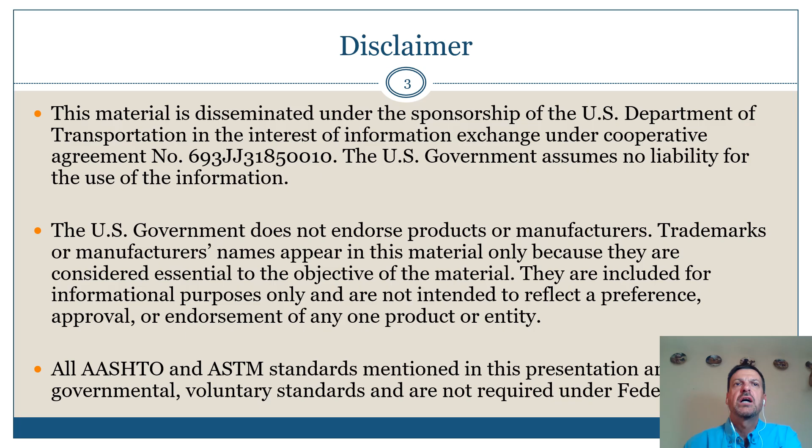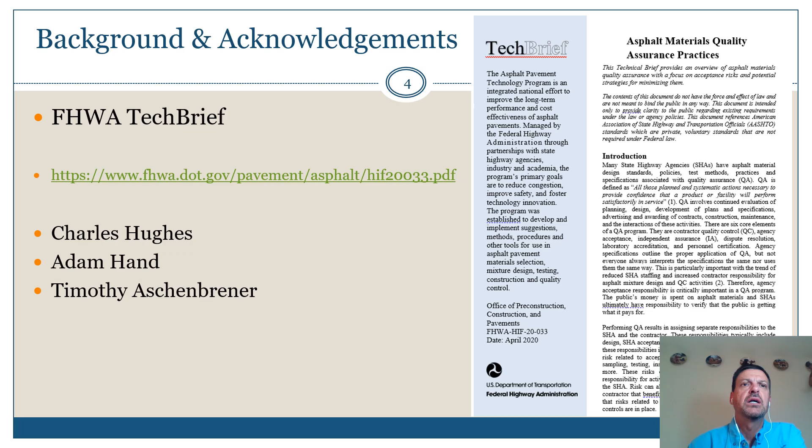In terms of background, this presentation is really based on a tech brief. The link to the tech brief is on the page there, and it was written by Chuck Hughes, myself, and Tim Aschenbrenner.

Why does it matter? Why did we put this tech brief together? Because it's important to agencies, contractors, and taxpayers. Quality assurance is defined as all those planned and systematic actions necessary to provide confidence that a product or facility will perform satisfactorily in service.

Everybody has a stake in that. It's important to agencies because they want to make sure they get what they pay for. It's important to contractors because they want a level playing field when they bid and build work. And it's important to taxpayers because they want to make sure the agencies have been good stewards of their tax dollars. When we implement a quality assurance program, responsibilities are assigned to different parties.

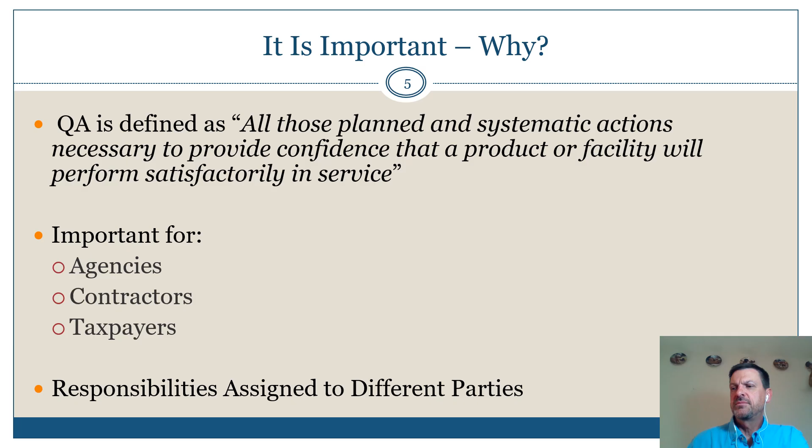We will sometimes end up with different risk in that situation. This is the 6 core elements of a quality assurance program, and the 2 key elements are agency acceptance and contractor quality control.

The other 4 items—technician qualification, lab qualification, as well as independent assurance and dispute resolution provisions—are there to really help ensure the accuracy of the agency acceptance and contractor quality control information that will be used in the acceptance decision made by the agency.

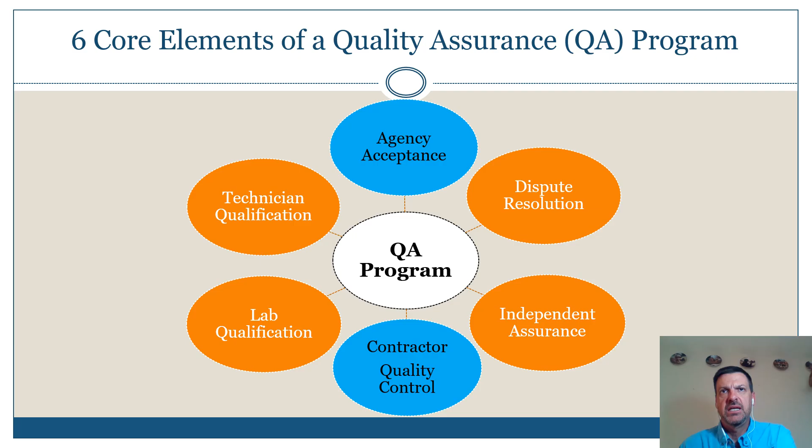AASHTO R10 has the definition of an acceptance plan, defined as the agreed upon process for evaluating the acceptability of a lot of material that includes lot size, sample size (number of samples), quality measure or measures used, acceptance limits, evaluation of risks, and pay adjustment provisions.

Different responsibilities are assigned to different parties because different folks do different testing—the agencies doing acceptance and the contractors doing quality control.

Risks: the acceptance plan inherently has risk built into it, and an agency needs to evaluate all those things listed on the slide when developing its acceptance plan, so that the risk is balanced between the contractor and the agency. The risks that exist from a statistical perspective are what we call buyer and seller risks, or beta and alpha risks.

Buyer risk is the risk that the agency, the DOT, is going to accept material that they shouldn't be accepting. Seller risk is the risk that the contractor will supply material or provide a product that meets the requirements, but does not get paid for because of the inherent risk in the specification.

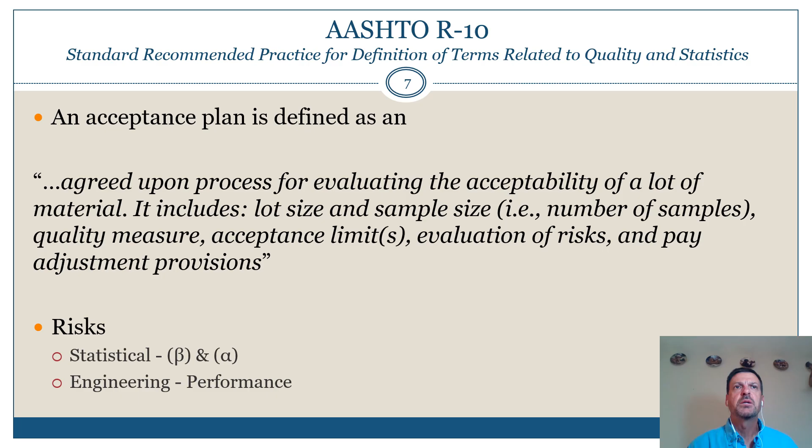You're going to see a couple of themes in this presentation. One is lab mixed material differing from plant produced material, and you know that can occur. We know it occurs, and it can be unintentional, and it can actually be intentional.

For today's mixtures—you think about volumetrics, go back to Bruce Marshall in the 40s and 50s, and then Superpave in the early 90s—for today's mixtures that are more complicated, the mixes designed back then, are volumetrics alone adequate?

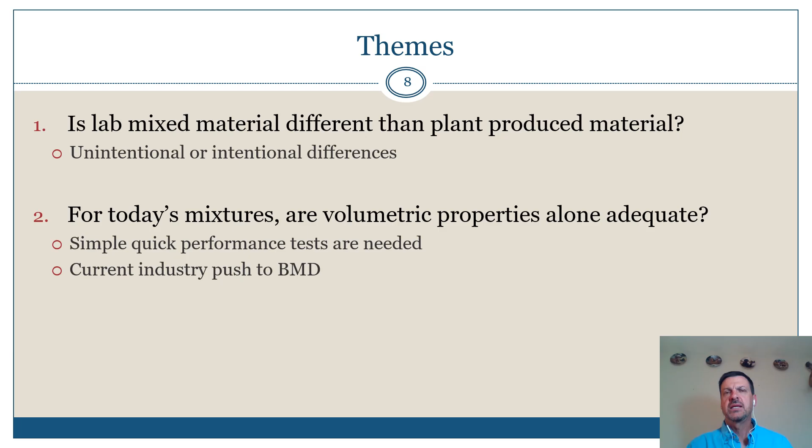We see that today the industry is looking for simple, quick performance tests that can be used in place of volumetrics in a balanced mix design procedure, or along with volumetrics in a balanced mix design procedure, to make sure that the agency is getting what it wants, the taxpayers' dollars are being well spent, and that the contractors are being fairly treated in the process.

I'm going to use a bunch of abbreviations in the presentation today, and you're going to see them on the screen. They're listed here. I'm not going to go through all of these. They're obviously going to be familiar to those of you that are particularly mix designers, but those of you that work in the industry.

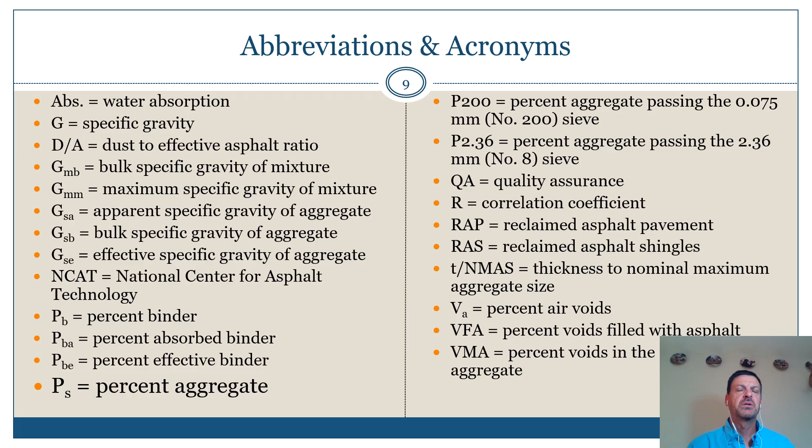There are different times when potential quality assurance risks occur. Some examples include during the mix design process, during verification or startup, as well as during acceptance. The material used in mix design is lab mix. At verification, you're using plant mix. And in acceptance, you're using plant mix.

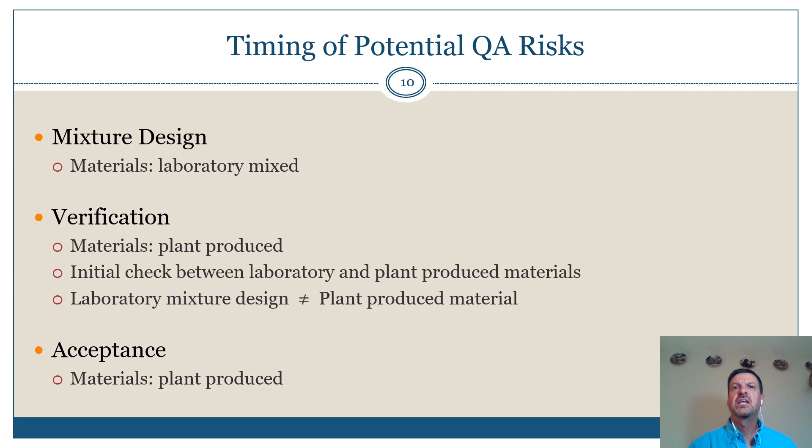Verification is that opportunity, either prior to producing mix if it's done in the lab, or, which I think is most important, on startup—maybe you call it a startup evaluation or a test strip—where you get the initial look at the plant produced mix, and you can compare that with the laboratory mix to see if there are differences, and if so, dig into why they exist and what can be done to resolve them.

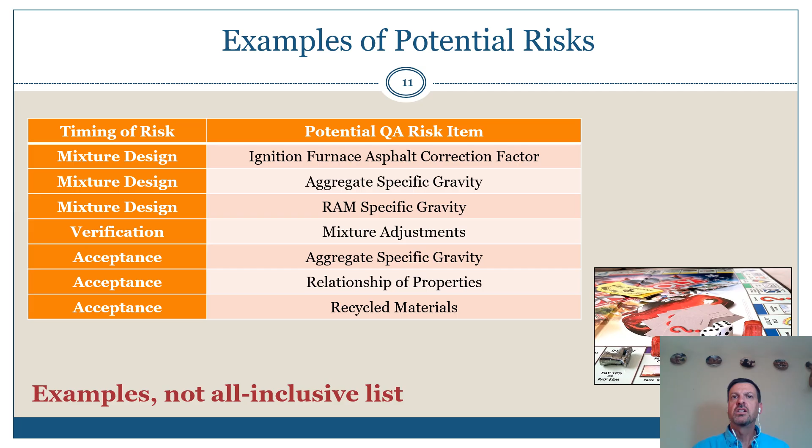Some examples of risks are listed on the slide. There are 7 examples, starting with ignition furnace asphalt correction factor, and ending with recycled materials. They occur at different times: the first 3 are during the mix design process, 1—mix adjustments—is in the verification process, and then there are 3 associated with the acceptance process. Now, this isn't an all-inclusive list, it's just an example of some commonly identified risks.

When it comes to ignition furnace correction factors, the ignition furnace is used to measure asphalt binder content, and the furnaces require a correction factor that is unique to each furnace and mixture. With the correction factor, mix samples are made at a known asphalt content and gradation, then those are tested in the ignition furnace, and the difference in the known and observed asphalt content and gradation are determined—these can be corrected also—and then you've got your correction factor or factors if you're going to use gradation correction factors also.

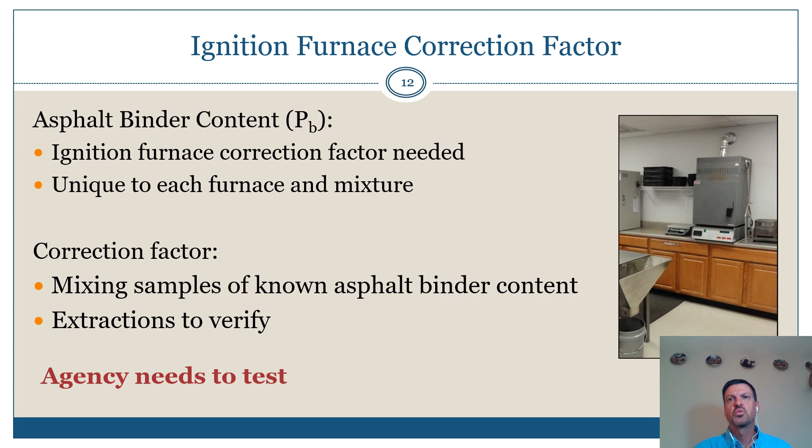It's important that the agency do ignition furnace correction factor testing, as well as the contractor or the engineering firm working for the contractor. So some risk mitigation strategies associated with ignition furnace correction factors are to only allow the DOT to prepare its own correction factor test samples per T308, which again is a voluntary standard, for each mixture and each unique ignition furnace, conducting unique correction factor determinations. In other words, something I've heard done many times is a sharing of correction factors between multiple ignition furnaces that are the same brand in the same lab. Even that is not appropriate per the AASHTO standard.

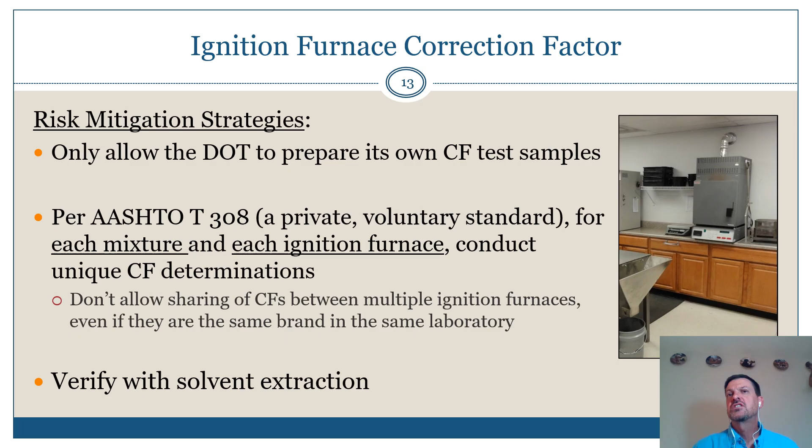Another really powerful mitigation strategy is to verify the asphalt content that was measured with the ignition furnace using solvent extraction. This is particularly powerful or important when mixes have RAP in them, particularly high quantities of RAP.

Aggregate specific gravities—I'm going to quickly run through a little reminder on specific gravities. Specific gravity is just the ratio of the mass of a material to the volume of a material. Now, bulk specific gravity, effective specific gravity, and apparent specific gravity—the mass of the aggregate is the same, right? So the only difference is the volume that's being considered.

With the bulk specific gravity, it's the volume of the aggregate and the surface voids. With effective specific gravity, it's the effective volume, because a portion of the surface voids are filled with asphalt binder, so that effective volume is less than the bulk volume. And with the apparent specific gravity, only the volume of the aggregate, not the voids, is used.

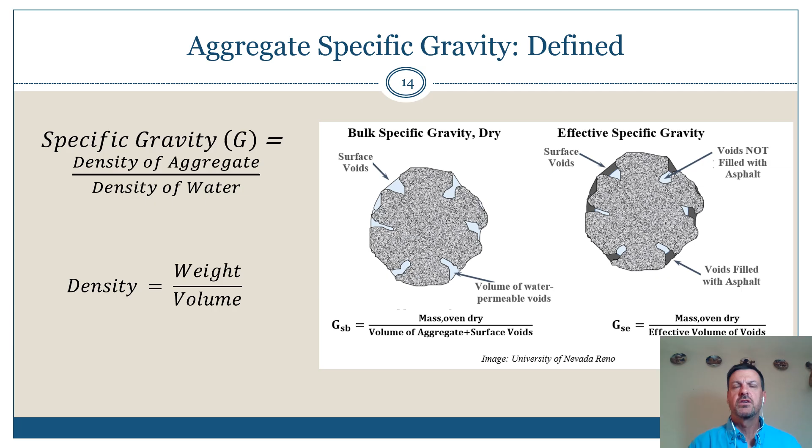So that leads us to the fact that specific gravities have to stack up appropriately. Because apparent specific gravity has the smallest volume and it's in the denominator, it's going to have the largest specific gravity. And if we go to bulk specific gravity, because it has the largest volume and it's in the denominator, that's going to have the smallest specific gravity. We can't defy physics, though—that's a reality, right?

The effective specific gravity is typically about midway between the bulk and the apparent, and that's because asphalt absorption is typically about 50% of water absorption. It's not exact, but in that ballpark. And with bulk specific gravities, if a bulk specific gravity is reported to be greater than an effective specific gravity, then there's negative asphalt absorption—that means there's a bust in the specific gravities, or the theoretical maximum specific gravity test, or RICE, that was used to determine an effective specific gravity.

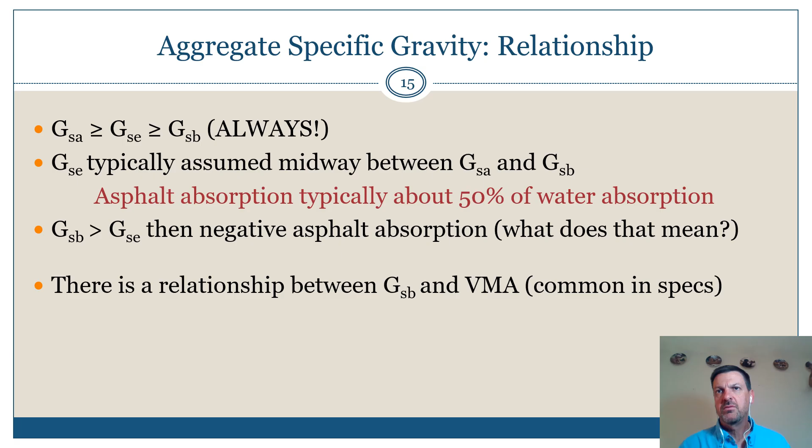Now, there's a relationship, and the reason we're hitting on specific gravities here is there's a relationship between bulk specific gravity and voids in mineral aggregate, or VMA, which is a very common specification parameter. So if you have small changes or deviations in your specific gravity, it will lead to changes in VMA. And if a mix designer is doing their job in a low bid environment and designing close to the minimum VMA criteria, you will actually end up with mixes having lower asphalt content than they should have.

What you see in that table is that if a bulk specific gravity is reported to be one hundredth higher than the actual bulk specific gravity, VMA will go up by about 0.3%, which would allow for a reduction in asphalt content of about a little over a tenth. At two hundredths, your VMA difference is over-reported by about 0.6%. So if you had a half-inch mix designed to 14%, right at the spec limit, you would actually have 13.4% VMA, not 14%, and an asphalt content about 0.3 lower than it should be.

And then as that difference increases, so does the difference in reported VMA, and the potential reduction in asphalt content.

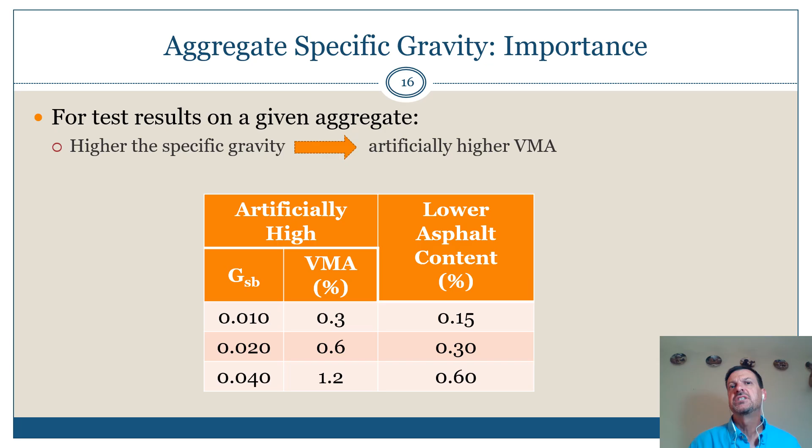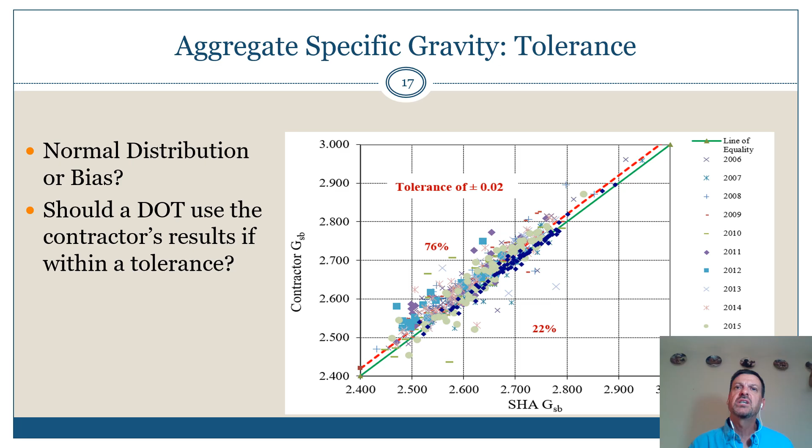There's a lot of data on that figure. If it were normally distributed, which we would expect, there should be about 50% on each side of that line of equality. So it suggests there's a bias towards higher contractor-specific gravities, and that's a risk associated with using tolerance.

So what are some risk mitigation strategies for aggregate-specific gravities? One is to routinely measure them and compare them with mix design values. Some things that state DOTs do is, for individual mix designs, go ahead and measure the aggregate specific gravity, especially if you've got variable aggregates in the area.

Some agencies will use what they call bench values. So what they'll do is, for big limestone quarries in the Midwest for example, the quarry operator will go in, form a bench, and samples will be taken, and sort of book values for that bench will be established and used by both the DOT and the contractor, and the DOT would make those measurements.

Other techniques observed are fixed frequencies. It might be on tonnage of production, or on a time frequency, for example every 6 months. That would depend on variability of the source, and the agency would establish that. And then verifying mix design bulk specific gravities during project startup evaluation.

So you had a bulk and mix design. You go to production. If you pull samples, cold feeds for example, and run gravities, are they still in the same ballpark? The other thing that can be done is reporting of all those properties listed: apparent, bulk, effective specific gravities, asphalt absorption, and absorbed asphalt in the mix design submittals, and verifying when the submittals are reviewed that the gravities stack up appropriately, and the amount of absorption is in the right ballpark.

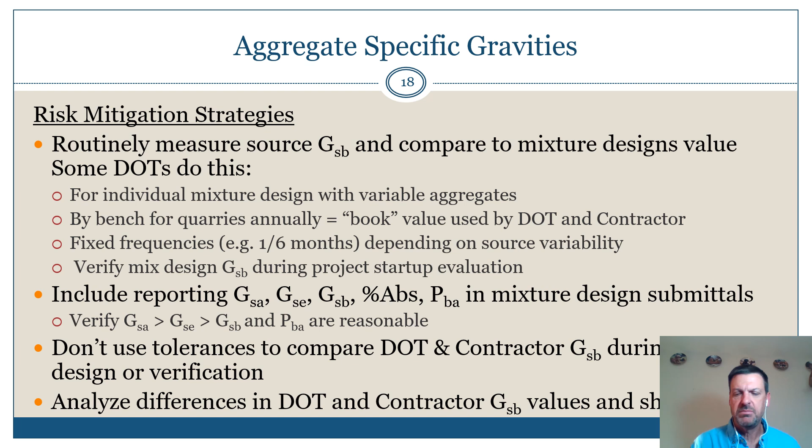And then finally, analyzing differences in DOT and contractor specific gravities, and sharing those with industry as a function of time — that's what that previous plot was. You could share that at pavement association meetings annually, for example.

So in summary, we want to use actual values, not tolerances, for bulk specific gravities. Using agency tests is important.

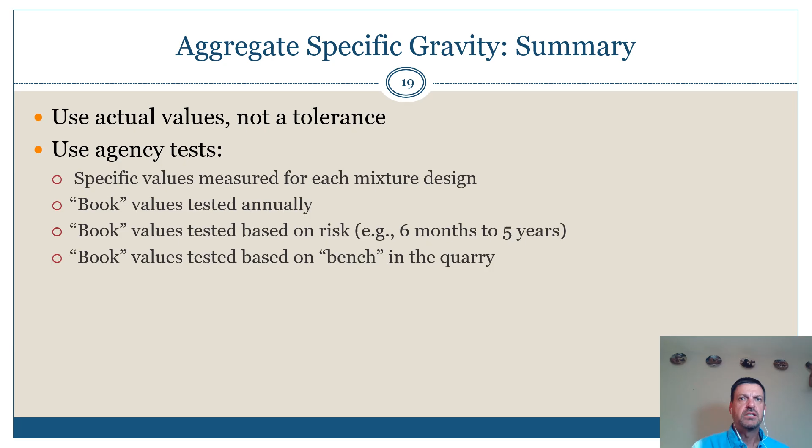Again, they may be specific values for each mix design, or some of these different types of book values that I talked about, for benches are based on tonnage or time frequencies.

Now we've looked at specific gravity and VMA. Years ago, when we started using small quantities of RAP, we would use effective specific gravity for our RAP specific gravity rather than the bulk specific gravity. The reason is you had to use solvent extractions to get the aggregates and then run the bulk specific gravities. Now we have ignition furnaces, but both of those techniques take time and effort. A simpler, quicker technique would be to measure the GMM, or theoretical maximum specific gravity, of a mix at a known or measured asphalt content, and then calculate the effective specific gravity. Much quicker, much easier.

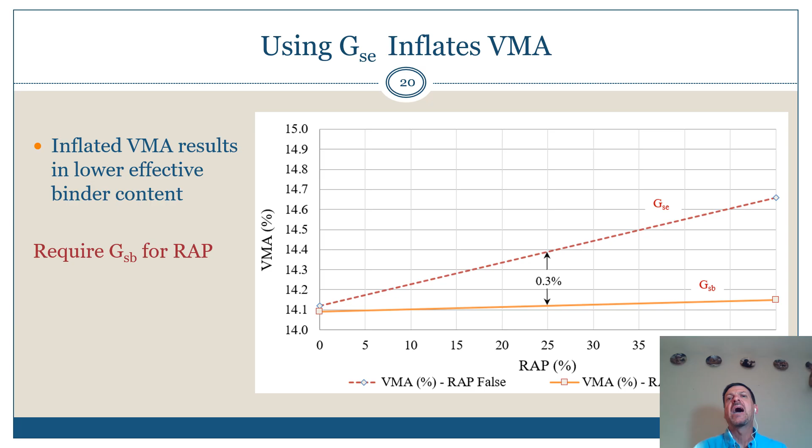When we were using 10% RAP, that wasn't a big deal, but now we're seeing 25 to 35%, and some states allow up to 65% RAP in mixes. This slide shows an example where, using 25% RAP and the effective specific gravity, the reported VMA is actually 0.3% higher than the actual VMA if the bulk specific gravity of the RAP had been measured. That's going to be mix dependent.

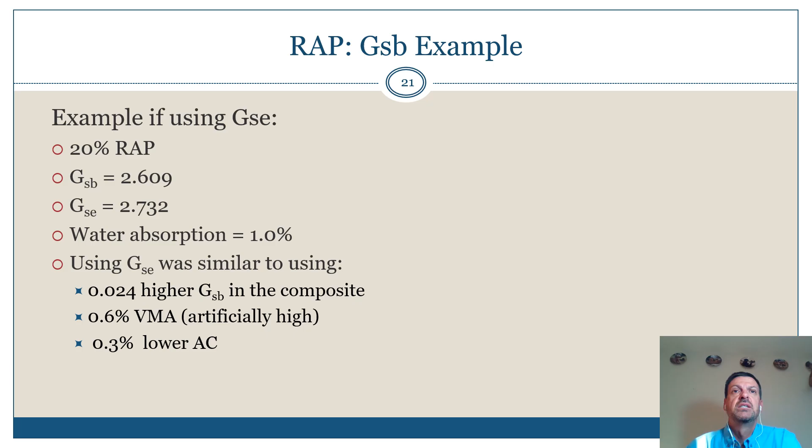This is an example with aggregate specific gravities a little higher than the one I just showed. Here we have 20% RAP, and water absorption is 1%. Using the GSE was similar to having a bulk specific gravity a little over 20 points higher on the composite mix. VMA was about 0.6% artificially reported high, allowing the asphalt content to be dropped by about 0.3%. So those are just a couple examples of why it matters.

So in terms of risk mitigation strategies: don't use GSEs for RAP, use bulk specific gravities. Don't allow the use of estimated G sub SBs—get the real GSBs and use them. Use GSBs for all the materials, the virgin aggregates as well as the RAP, and then monitor and verify GSBs during production.

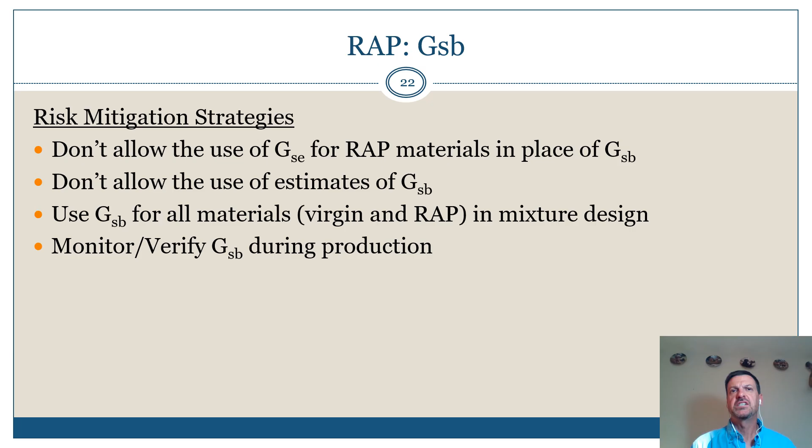The next category or time that we said risks occurred was in verification—that's in making mix adjustments during startup. NCHRP Report 818, developed by the folks at LSU, is entitled Comparing the Volumetric and Mechanical Properties of Laboratory and Field Specimens of Asphalt Concrete.

It summarizes work where, I think, 7 states provided mixes from around the country, and they prepared what they call design, or lab mixed lab compacted; production, which was plant mixed lab compacted; and construction, or plant mixed field compacted specimens. They measured the volumetric properties listed on the slide, as well as rutting, dynamic modulus, and indirect tension dynamic modulus.

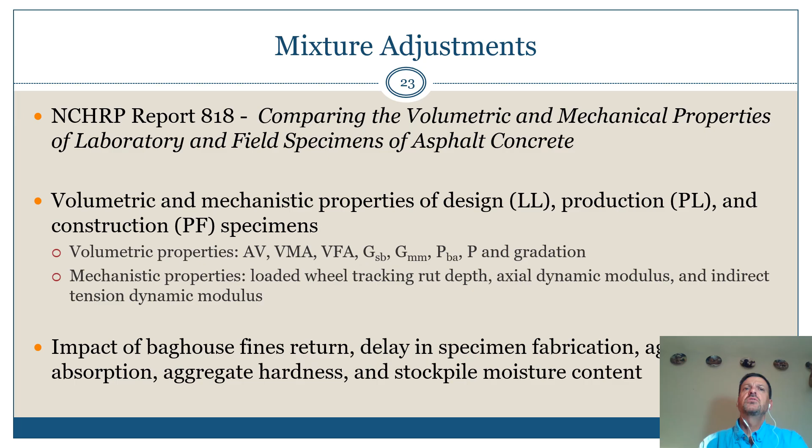They varied baghouse returns, specimen fabrication time, and aggregates with varying absorption levels, hardness levels, and stockpile moisture levels, and looked at the influence of those factors on the volumetric and mechanical properties.

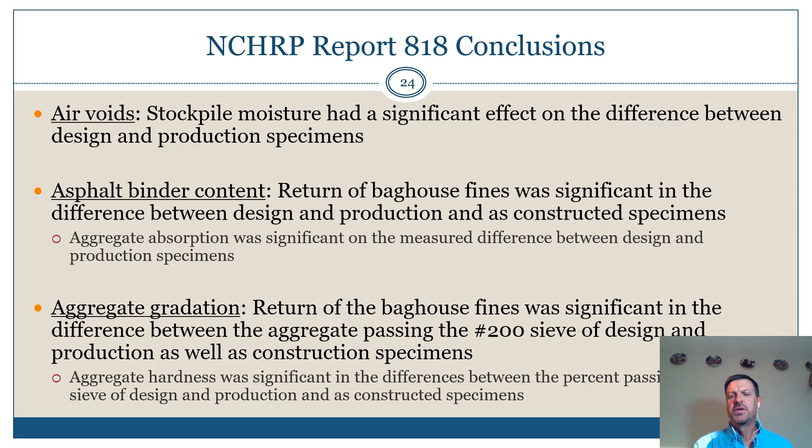They found that air voids were impacted by stockpile moisture. Asphalt binder content was impacted by baghouse fines, and aggregate gradation had an impact—basically, the return of baghouse fines led to differences in the amount of material passing the number 200 sieve, which impacted those properties. This slide summarizes the report's findings for the different volumetric properties and gravities.

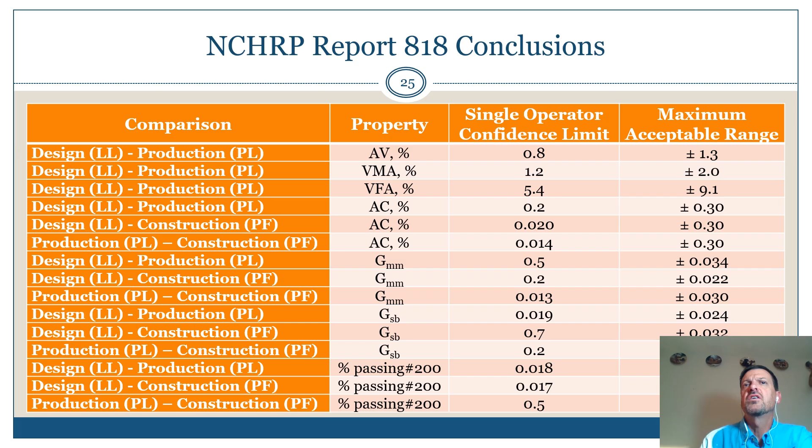They came up with the single operator confidence limit as well as the maximum acceptable range for the different volumetric properties and gravities. The point here is that differences occur, and it's good to understand what those differences might be and go ahead and make adjustments to either minimize or eliminate them.

As a rule of thumb, when it comes to binder content, about a 1/10% change in binder content leads to about a 1/4% change in air voids. So if you increase your asphalt content by 1/10%, your voids go down about 1/4%, or vice versa—if you reduce your asphalt content, your voids will go up.

When it comes to aggregate adjustments, a 1% change in P200s can lead to anywhere from about 0.3 to 1% change in VMA, depending on the gradation type—I'll share more examples on that in a minute. For coarse graded mixes, if you reduce the amount of material passing the number 8 sieve, it will increase your VMA, and conversely for fine graded mixes.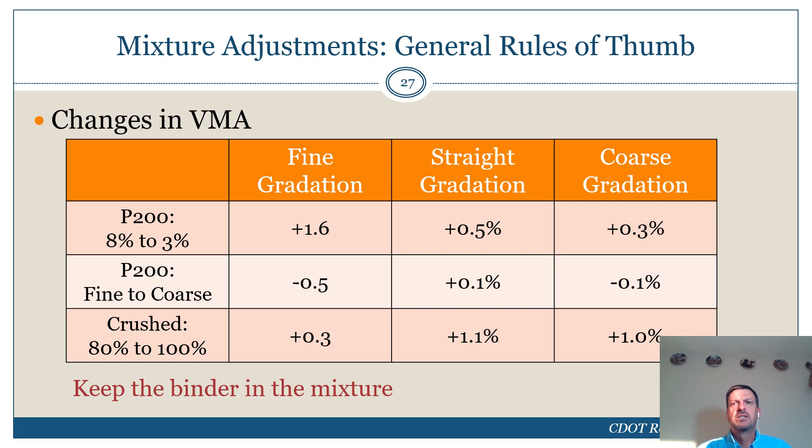Now, if we go to the bottom of the table and look at the amount of crushed material used, going from 80 to 100% in a fine graded mix only led to about a 0.3% change in VMA. In a coarse graded mix, it led to about a 1% change in VMA. The point is that these changes are going to be unique to each individual gradation used on a project. You really need to keep that in mind, again with the goal of keeping the asphalt binder in the mix.

So what do we have for mitigation strategies associated with mix adjustments? One really important thing is standard specifications or construction manuals should indicate how to address differences between mix design and plant produced mixtures. A lot of specs are void of that. Only allow gradation adjustments before allowing asphalt binder content adjustments. In other words, try to get that difference between the volumetrics from lab to field mitigated by making gradation adjustments.

This may include adjusting the amount of baghouse fines that are returned, and it may even require that some be wasted. Include VMA and dust-to-asphalt ratio, or dust proportion acceptance criteria, for plant produced mix that are equal to the minimum values in AASHTO M323, and only allow baghouse fines to be returned to the drum mixing plant or to the batcher -- well, never mind, it's on a continuous mix plant -- to the drum if they're interlocked and accurately metered.

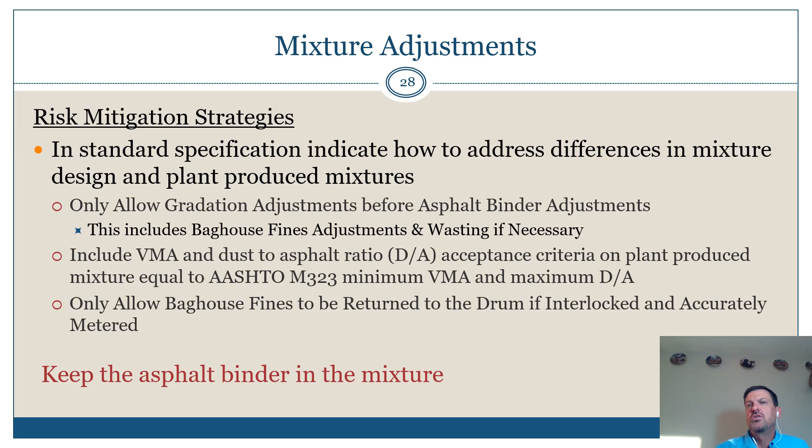In other words, you don't want a screw feeder or vane feeder running at a constant speed, returning fines to the drum when the production rate in the drum is going up and down. Because as the TPH, the tons per hour running through the drum, changes, if you have a constant feed of baghouse fines, then the P200s are going up and down. So again, they need to be interlocked, and they need to be accurately metered.

This slide has some sort of what-ifs. Again, it's a rule of thumb or ballpark kind of thing you can look for. In this slide, you've got relationships on the right. When GMM goes up by a hundredth, air voids go up by 0.4%. When GMB goes up by a hundredth, air voids go down by 0.4%.

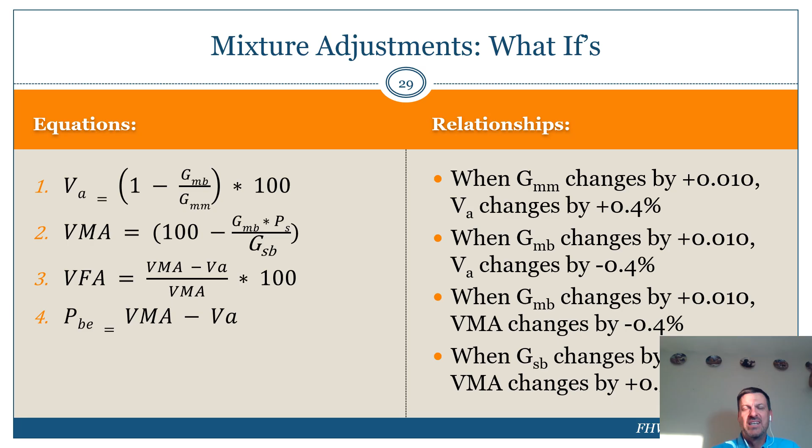When GMB again goes up by a hundredth, VMA changes or goes down by 0.4%, and that makes absolute sense -- it should. And when GSB changes by a hundredth of 1%, again we get a related VMA change. So this is a sort of absorption check, and really what it is, is a reality check that we can't defy physics, right? We know apparent, effective, and bulk specific gravities have to stack up the way they're shown on the slide.

So if you review a mix design and you've got apparent and bulk specific gravities that are equal, you've got no absorption -- something's clearly wrong. If your effective specific gravity is equal to your bulk specific gravity, you have no asphalt absorption -- again, something is wrong. And if your effective specific gravity were equal to your apparent specific gravity, your asphalt absorption would be equal to your water absorption -- again, something's wrong, right? There's a problem.

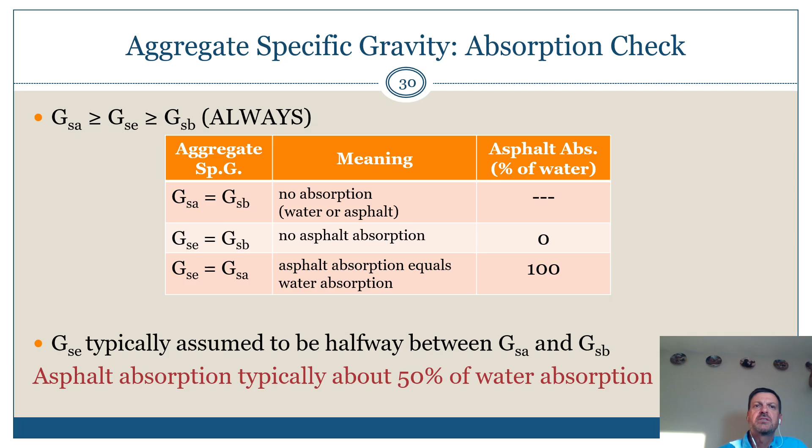So your GSE is typically about midway between your bulk and apparent specific gravities, and that's because your asphalt absorption is typically about 50% of water absorption. So for a given mix, the relationship between apparent, effective, and bulk specific gravity shouldn't change.

There's small changes in gradation and so forth in production, or variability associated with testing, but you shouldn't see big changes in those properties. You might see some changes in the effective specific gravity due to the mixing temperature, the production temperature, and storage time, how long the mix is kept at elevated temperature. If you take an aggregate with high absorption capacity and leave it in a silo for 24 hours, you'll get a change in your rice value from if you had taken a sample shortly after production, and then there's a change in aggregate properties.

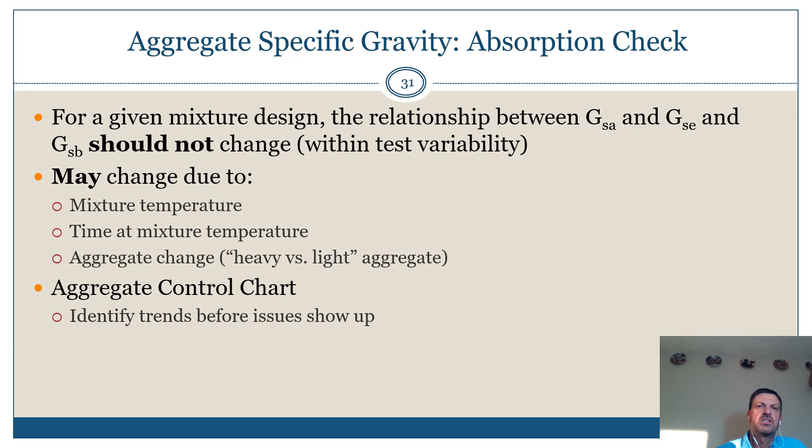You can use control charts to identify trends. This is some data provided by CRH America. In the first column you've got tests, and there's over 25 tests there. You've got GSE values calculated by taking samples in production, measuring the GMM and the asphalt binder content, and then calculating them. In the third column, you have running averages of the previous four tests.

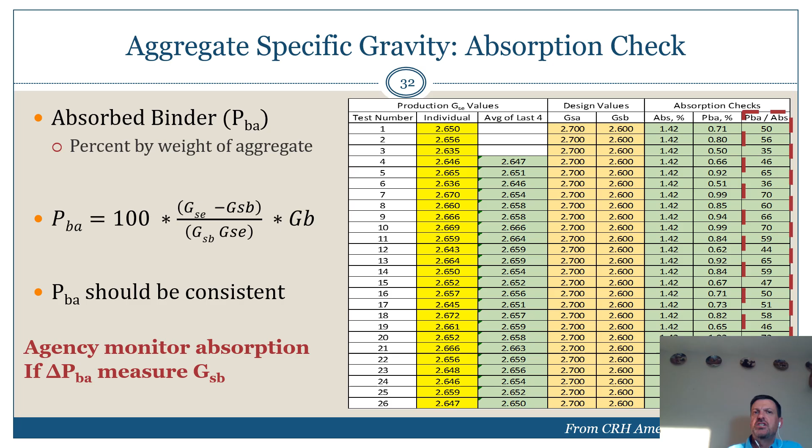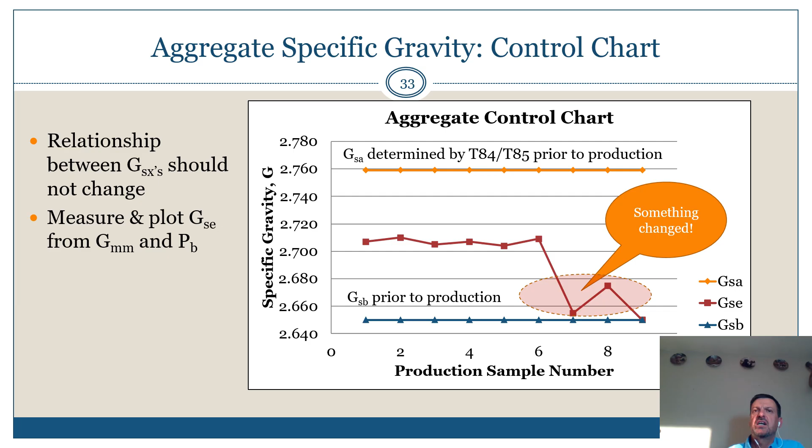Control charts are really simple, and this is a great tool. If you do a control chart, you put your design apparent and bulk gravities on there, and then plot your effective as a function of time. It's really easy to pick up changes, and when those changes occur, you know you need to go do something about them.

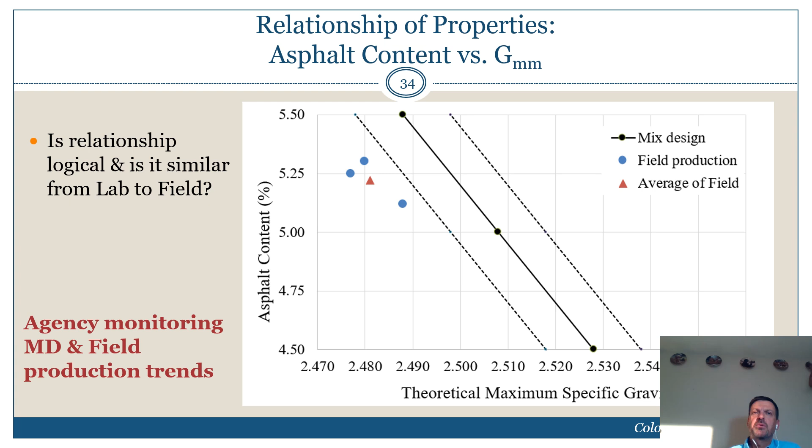This slide shows the relationship between theoretical maximum specific gravity and asphalt content from a mix design, the solid line moving from left to right. We know as asphalt content goes up, theoretical maximum specific gravity goes down. So you've got the mix design values on there, then some field production values. There are two things you want to look at: one, how close are the field production data to the mix design? Is there a shift, and how large is the shift? Then directionally, are they going the same direction? You can see in this example there's a pretty good shift, although directionally they're going in about the right direction.

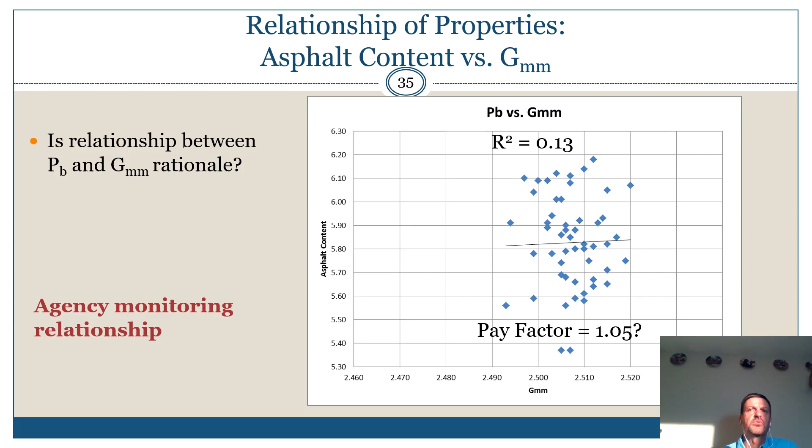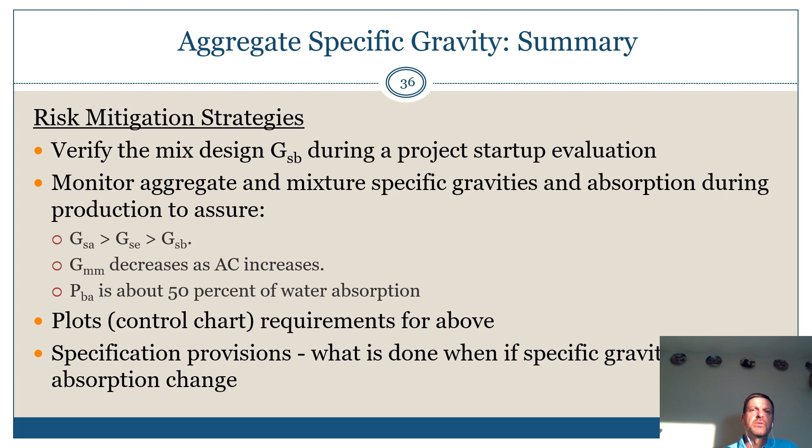Again, it's a simple tool - measure them and use them in production. So what do we have for mitigation strategies? Verify your G sub SB's during startup, mix design and startup evaluation. Monitor your specific gravities and absorptions during production. Make sure that they're rational, the trends are in the right direction. The absorption is no more than about 50%, or is in the ballpark of about 50% water absorption. An easy way to do that is with control charts. And then have specification provisions that direct what should be done when these differences exist.

The last mitigation example I'm going to hit on here is acceptance of RAP as an example, but it could be anything - RAP, RAS, fillers, fibers, rubber, whatever. And the question's asked: how do you know that you're getting the specified quantity?

Well, some risk mitigation strategies are: one, make sure that your plant's calibrated and verified on a regular frequency, and that the calibrations are documented, the verifications are documented, and they're witnessed by a plant inspector. Having RAP and RAS production and stockpile QC programs, which will flag inconsistencies that can be addressed while those materials are being produced, rather than after the mix is coming out of the plant.

Having specification items for reconciliation of plant control data logger reports and loadout tickets, as well as JMF targets and plant stockpile inventory, and even asphalt binder inventory at an individual project level. This is really easy on portable jobs. It's a little more challenging in town, but it's a good process to use.

And then surveying dedicated piles of RAP. That's not a rational thing to do with RAS because the piles are so much smaller. And then having inspectors at asphalt plants.

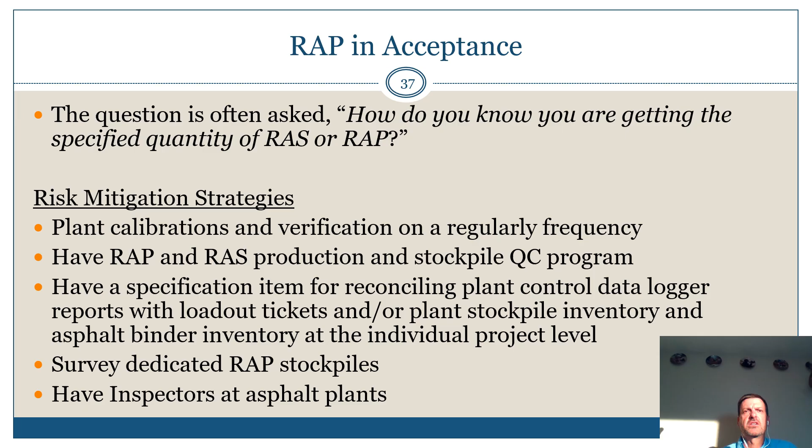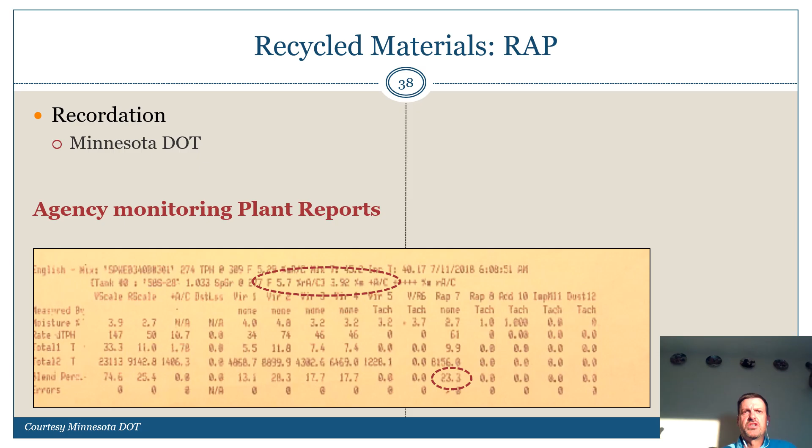This is an example of a recordation, a basic data logger output. Basically you're looking at whether the percentages coming out of the plant report are consistent with the JMF from the mix design. Is the asphalt content set point correct? Is the contribution from the RAP correct? Is a moisture correction in there, and is it correcting appropriately?

Another one is with recycled materials having appropriate bins. Bins are specifically designed for feeding recycled materials, in particular RAS. For RAP, you can use cold feed bins, but you just have to be really careful. Make sure you've got scalping screens on them. The steeper the sidewalls on the bins, the better. And if bins have air cannons and vibrators on them, they'll prevent clumping of material that will then slip off and lead to slugs in the feed.

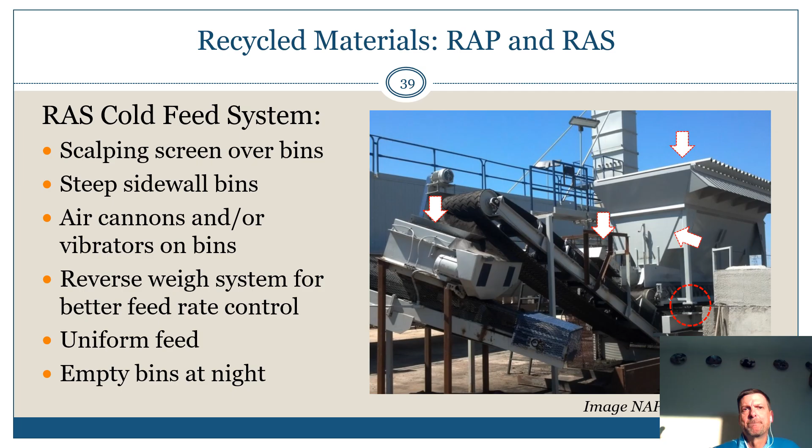Then having a uniform feed, not only getting it uniformly coming out of the bin but keeping it uniform as it goes into the plant. And one of the things with RAS is, especially in warm climates, it's good to empty your bins at night.

So in summary, we have engineering statistical risks, and they have potential costs associated with them. The risks have changed with transitions from method to QA specifications. Risks exist because specifications lack detail, and lack of detail leads to different interpretation of specification intent.

An example that's really common is retesting. Do your specs address retesting, whether it can or can't be done? And if it can be done, what the process is and how the data is used.

It's the DOT's responsibility to review their policy, design standards, test methods, and practices and specifications for acceptance risk, and make changes based on the risks identified, then communicate and train on those risks. Now, I personally believe that the contracting industry has a responsibility there too, and that is to help the DOT review their specifications to identify risks and opportunities, making sure that everybody's getting what they want - the agency, the contractor, and the taxpayers.

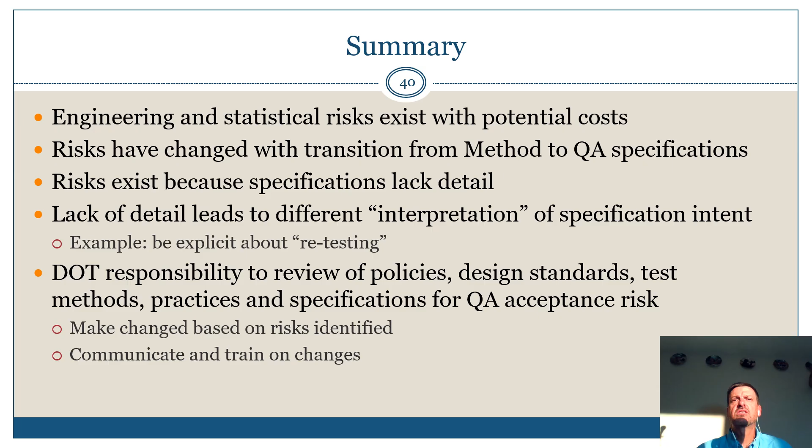Now, in wrapping up, I'm going to share an example from Maine DOT where in one year they'd experienced an estimated 20% loss of pavement service life due to raveling, at a cost estimated to be about $15 million. They went through their specifications and identified 7 potential causes.

One was higher production P200s in their specifications and data, without a production dust-to-asphalt criteria; no aggregate durability test; insufficient thickness to nominal maximum aggregate criteria; not verifying GSBs, which led to inaccurate volumetric properties; higher than desirable permeability from multiple causes; and then no moisture susceptibility test.

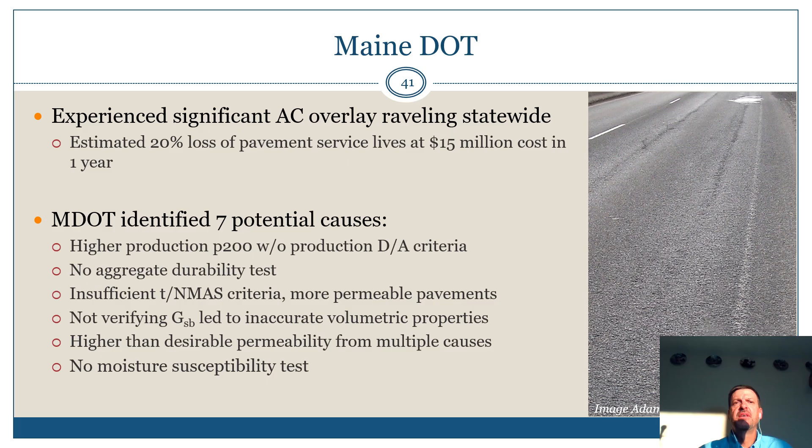So what they did to improve their test methods, specs, and practices to reduce these risks: improve the weighting of pay factors for the 200 sieve and P200s from mix design to construction criteria, having tighter criteria there, implementing a field-produced dust-asphalt ratio criteria, improving the acceptance and validation process for bulk specific gravities, and then implementing a wheel track test for moisture susceptibility and rutting.

And then implementing an aggregate test to improve aggregate durability, and then establishing guidelines for thin overlays that included thickness to nominal maximum aggregate size and gradation type.

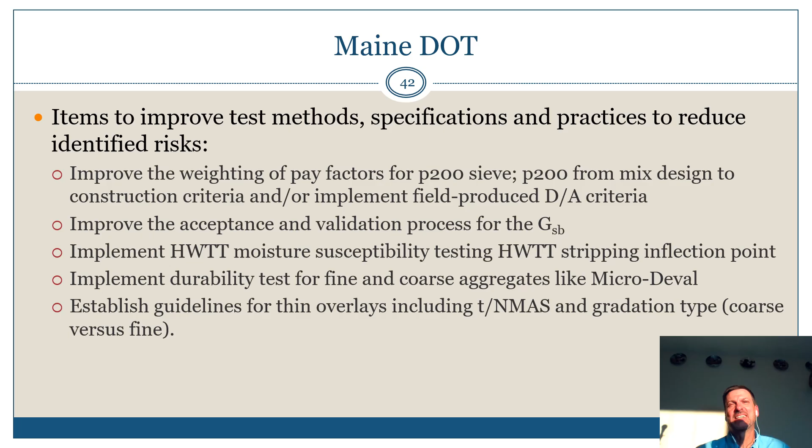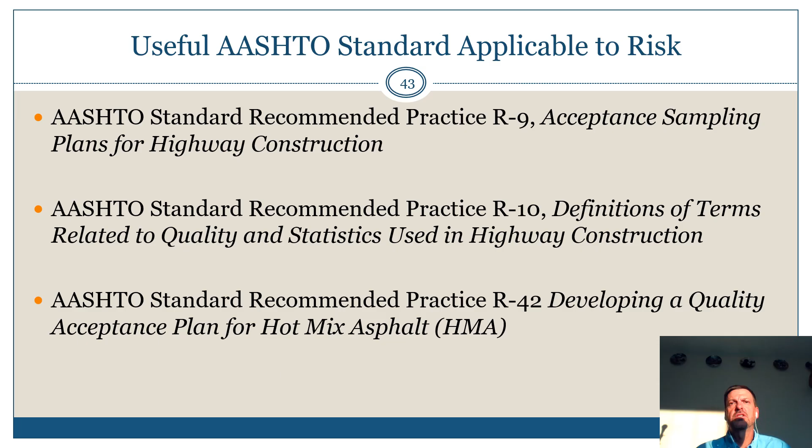It's worth noting that there are 3 AASHTO standards that are really good tools when you want to look at quality assurance risk, and they're listed on the screen here.